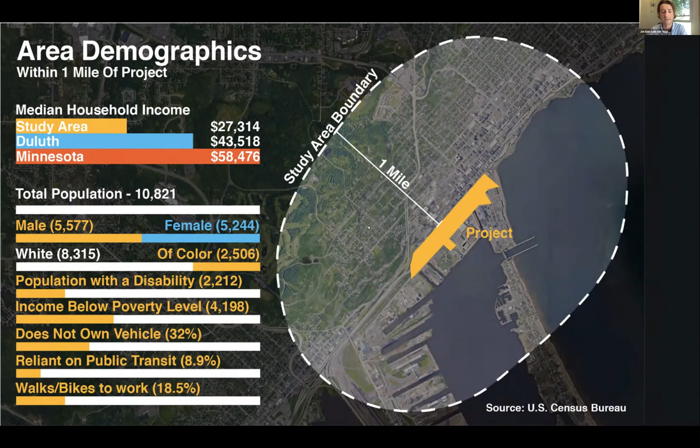This chunk of freeway takes up about 20% of what is considered our downtown area by land. And it doesn't even serve 32% of the people living nearby. So it doesn't seem like it makes a lot of sense if we're trying to plan our transportation networks in a way that is serving everybody in the community.

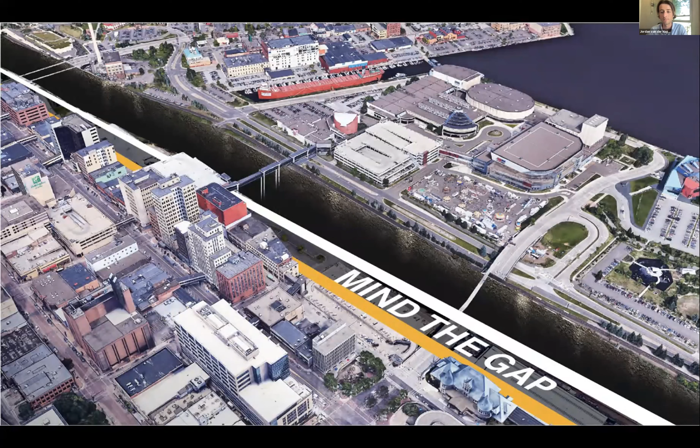And so if you don't have a car, this is what it feels like. A freeway by default is a mode of travel that is exclusive only to people in vehicles. So if you're not somebody who has a car, this is what you've got to work with to get to the waterfront.

And then even for traffic, we see the way that the freeway has congested our downtown and Canal Park areas by forcing everybody into these bottlenecks to get across the area or onto the freeway. Interstate 35 itself is pretty under capacity, whereas the Lake Avenue overpass is almost at, I think, 200% of what it was intended to handle, or at least at the point when this information came out, it was. So even for cars, it doesn't make a lot of sense.

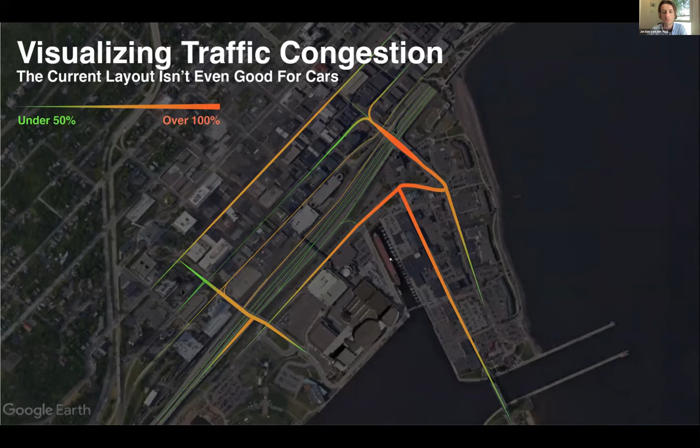So we're trying to figure out how can we rethink this area to spur economic growth, create green space, improve safety and mobility, and create a unified downtown. By replacing this infrastructure barrier that keeps people apart with a series of places and spaces intended to bring people together, we can create shared experiences amongst people of diverse backgrounds to improve understanding and compassion within our community, especially after all of this time where we've been isolated socially and politically and among so many other lines. It's really important for us to think of ways we can come together.

So there would still be a pretty reasonable vehicle corridor running through this space. We intend to design that to be able to handle the traffic that we see in our downtown. But in addition, it would also be able to accommodate rail traffic, bike and pedestrian traffic, and then also reintroduce a street network into the downtown and Canal Park areas to really kind of stitch them together.

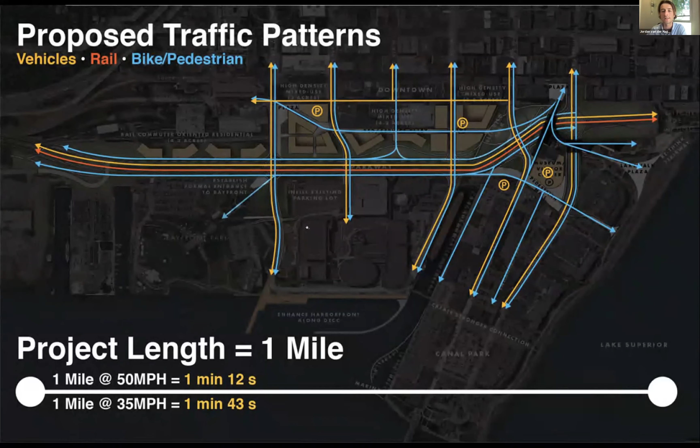And then with the space that remains, it'll be broken up into one of two uses. 20 acres of this land could go towards new development options. This gives us an opportunity to create things that are missing from our downtown and figure out what our community's priorities are and address those in a way where we don't have to demolish any existing development. All we're getting rid of is concrete here, so it's not displacing anybody.

And then with the remaining space, we would be creating new parks, greenways, parkways, and connecting existing green spaces together to create a system of amenities for people in the community, but also creating spaces to overlay green infrastructure and treat stormwater and handle other environmental concerns that our city is facing.

And so just the preliminary concept that we've put together decreases roadway pretty considerably. It almost doubles green space. It doubles the amount of buildable space, which increases tax revenues. And it also decreases our road maintenance burden that we have to face as a community.

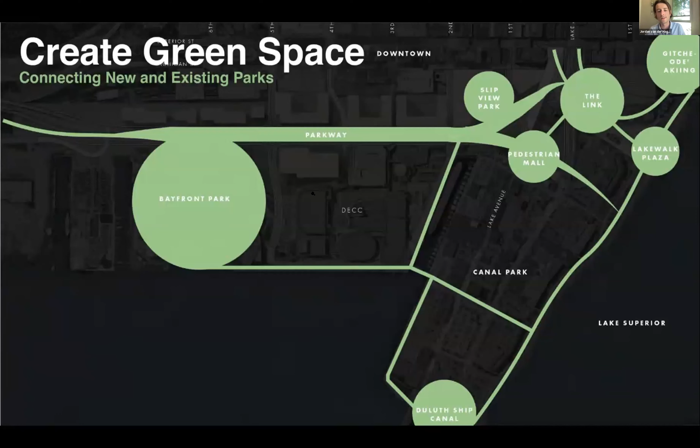So again, this is kind of what we're looking at right now, and this is what we're proposing. You can really go deep into this and overlay a lot of different things. These are just items that we've heard from people in the community of what they want to see: transit options, rail options, green infrastructure, new developments, and then maintaining traffic flow to some degree.

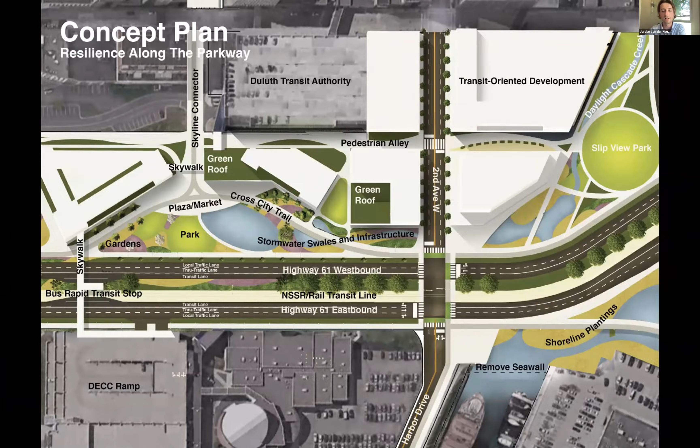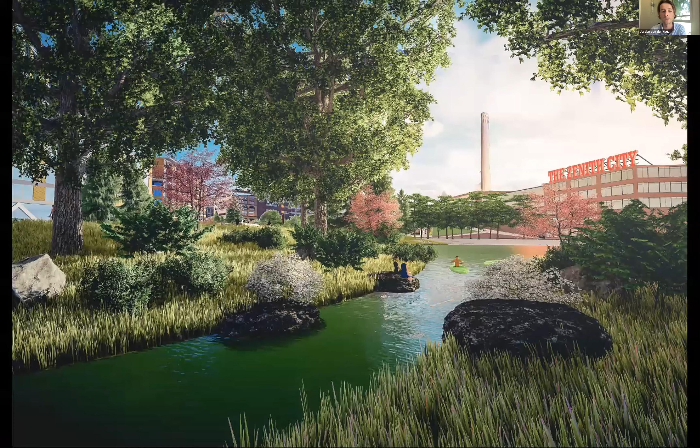So we have a real opportunity here to think about what this space could be in terms of becoming something that the community can really enjoy more than they can with the freeway as it is. But in order to do that, we have to get rid of the freeway first. And so how do we do that? That's kind of the question we're hoping to answer today.

So as we move on through our next speakers, hopefully we can come away with some answers and keep this moving forward. So with that, I'll turn it over to Ben.

Thanks, Jordan. That was a great overview of what you all are doing. And I even saw some new things, which is exciting. It looks like you guys have really been working on developing the concept.

So let me do the infamous screen share dance here. And what are you seeing? What are you seeing here? It looks right, the end of the road, right? All right, sounds good.

Yeah, so to build off what Jordan has said, I'm going to do a little bit of storytelling about the Highways to Boulevards movement. And storytelling, I think, is really important for campaigns like the Duluth Waterfront Collective, thinking about what's happened in the past, what people experience now, and what we can get to in the future.

So as I said in my introduction, I'm Ben Crowther, program manager for the Congress for the New Urbanism's Highways to Boulevards initiative. Since 2008, CNU has been gathering data and information on both the benefits and the best practices of highway removal. And we've been working with advocates like the Duluth Waterfront Collective nationwide. As I also said, we publish every 2 years our Freeways Without Futures report, which in this edition included Duluth's I-35. So I'm here to talk a little bit today about why we included I-35 in the report and where it fits into this larger Highways to Boulevards movement.

So we've seen this image already, I-35 through downtown Duluth. For a bit of context, this part is the northern terminus of the nearly 1,600-mile long interstate that goes all the way down to Laredo, Texas, at the other end of the country. The highway is as wide as 8 lanes in some places, including the frontage roads. And as Jordan said, it occupies around 20% or so of the land downtown.

It's a really significant barrier between downtown and the Lake Superior waterfront. And as those of you who live there know, there's only 3 connections to get across it: Lake Avenue, Harbor Drive, and the pedestrian Sky Bridge.

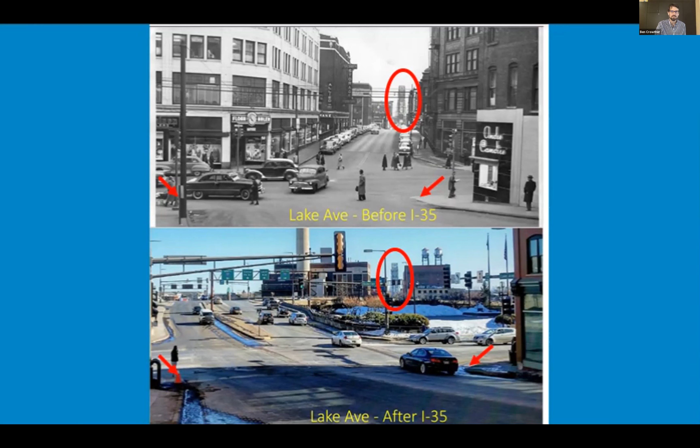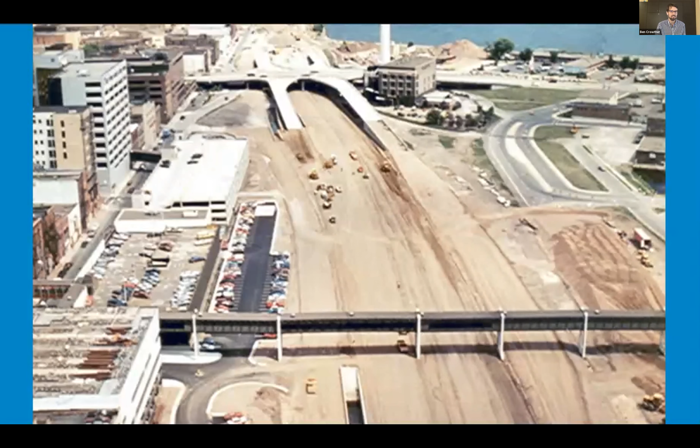And so here's where those buildings along Lake Avenue went. This is the construction of I-35. It starts in Duluth in 1967, and the downtown portion is largely completed between '87 and '91, which is really late in the era of interstate building.

But in response to this plan, you get Duluth residents forming several different advocacy groups in an attempt to steer the highway's path as it approaches downtown. They're ultimately able to direct that to some degree, preserving the natural asset of the waterfront, but are unsuccessful in keeping the highway completely out of downtown. So the highway builders and advocates reach a compromise which routed the road along the east side of downtown through a series of tunnels and freeway caps—the configuration that exists in Duluth today.

And while I was digging into this history, I came across a 2010 article in the Duluth News Tribune, part of which I think it's worth reading aloud for its impact. So today it's easy for visitors to see the benefit of the interstate. The Lake Walk Bike and Pedestrian Trail follows the rebuilt shoreline. Young and old alike can wade into the lake, throw stones, or choose to clamber over massive boulders. While they walk or bike, people can admire the 550-foot-long ceramic tile image wall below Lake Place on the outside highway wall.

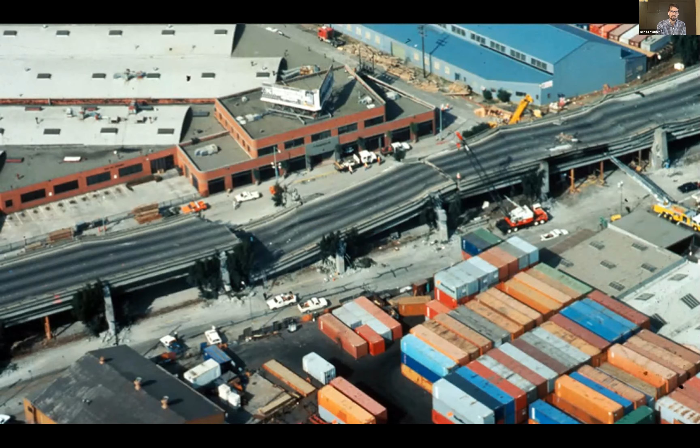In 1989, the Loma Prieta earthquake struck California's Bay Area. In Oakland, the double-decker Cypress Freeway in West Oakland collapsed. When Caltrans went to rebuild it, West Oakland residents who contested its original construction mobilized again and convinced the state to reroute the freeway to the periphery of their neighborhood rather than directly through it. This is the former route of the Cypress Freeway today, now called the Mandela Parkway. The freeway's right-of-way has been repurposed into a landscape median that West Oakland residents are able to enjoy.

That same earthquake also damaged San Francisco's Embarcadero Freeway, whose route was never completed due to a 1959 freeway revolt. Rather than repair it, the city opted to remove it and reclaim access to its waterfront.

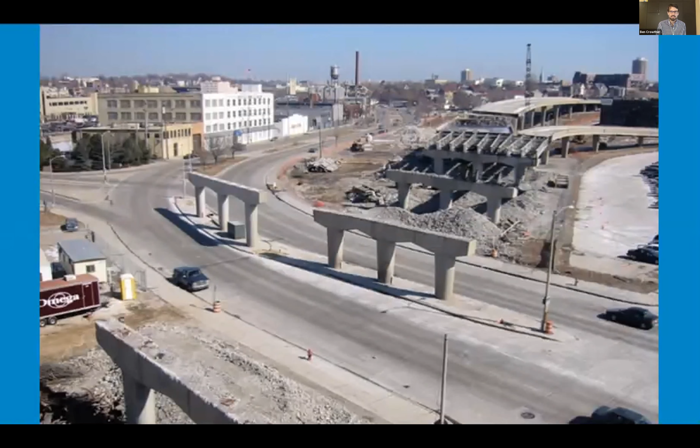Fast forward a few years to 2002, and the city of Milwaukee chooses to dismantle its Park East Freeway, once again a highway that was never completed due to a freeway revolt. This active choice to remove a freeway heralds a new generation of the Highways to Boulevards movement, one where an act of God isn't required for highway deconstruction.

Out of this generation of Highways to Boulevards projects, we get examples like the removal of the Riverfront Parkway in Chattanooga, a city that's on a scale probably more comparable to Duluth than Oakland or San Francisco. In 2004, the city transformed its 4-lane limited access highway into a 2-lane boulevard that provided easy pedestrian access to the waterfront. It's worth noting that the old Riverfront Parkway, that 4-lane road, carried approximately 20,000 vehicles a day at its peak. We'll come back to that number a little later.

Then in 2017, Rochester's Inner Loop becomes the most recent addition to the Highways to Boulevards completed projects. I won't step too much on Maria's toes here, I suspect she's going to talk a lot about this, but by filling in the depressed Inner Loop, the city's able to reclaim 6.5 acres of land for building. It cost $22 million to fill in the Inner Loop and rebuild Union Street.

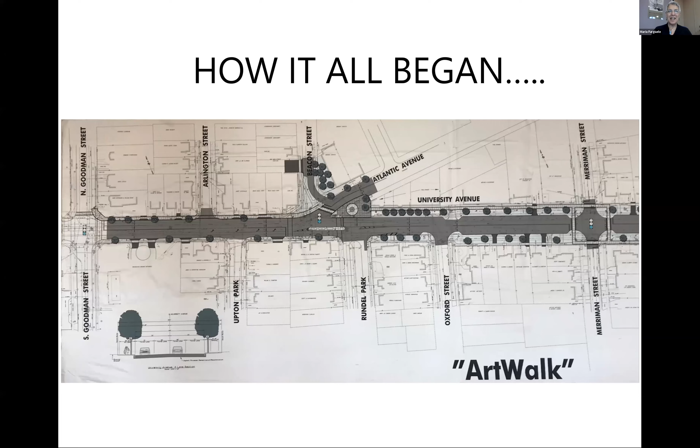As a result of this project, the community members determined that they wanted to create a link between the existing Memorial Art Gallery to the west and the Eastman House and Museum of Photography. This became known as Art Walk, and the trail incorporated public art, custom designed borders for the sidewalks, community art installations all along the trail. The neighborhood became known as the Neighborhood of the Arts and is now one of the most desired neighborhoods in our city.

Johnny Monroe and the group of architects became the founding members of the Urban Design Committee of the AIA, which eventually led to the founding of the Rochester Regional Community Design Center, now renamed the Community Design Center of Rochester. I know, not much better.

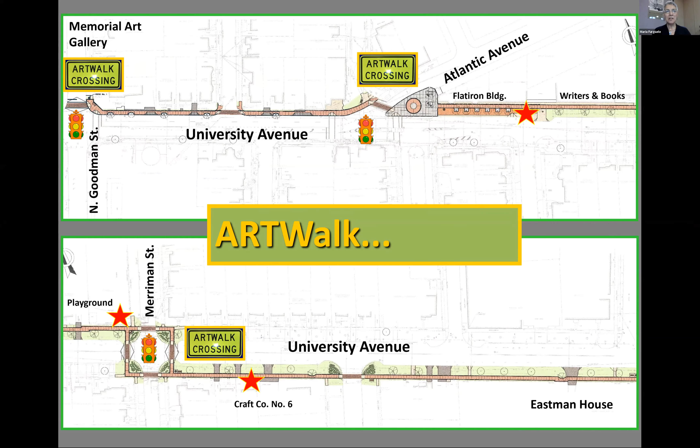This is a view of the Art Walk project showing one of the public art installations, a historic building in the works there. So it's quite a beautiful place to be.

I show you this slide just to illustrate the incredible importance that road design can play in creating a transformative impact in placemaking. Shortly after this project was completed, a publication noted that this was an important example of the positive effects of community-based planning.

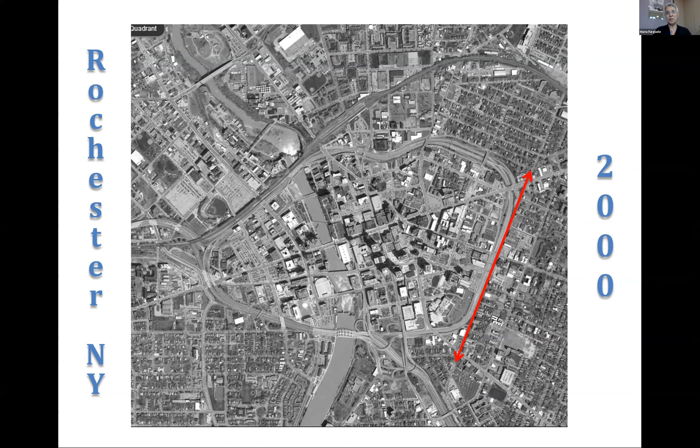This is Rochester in 1930. Notice mostly the fine-grained texture of the urban pattern. Here we are in 1960, where you begin to see the clearing for construction of the inner loop. Notice also how that fine grain texture is being consolidated into larger blocks. Here we are in the year 2000, where you clearly see the result of the inner loop and how it completely separates the downtown district from all of its surrounding neighbors. That red arrow locates the Union Street corridor, which is the Inner Loop East project.

This diagram shows that the Inner Loop project was divided into two projects. One is the Inner Loop East project that was completed, recently completed about 2018. This is the Inner Loop North project, which is under consideration currently. The dividing line is generally Main Street.

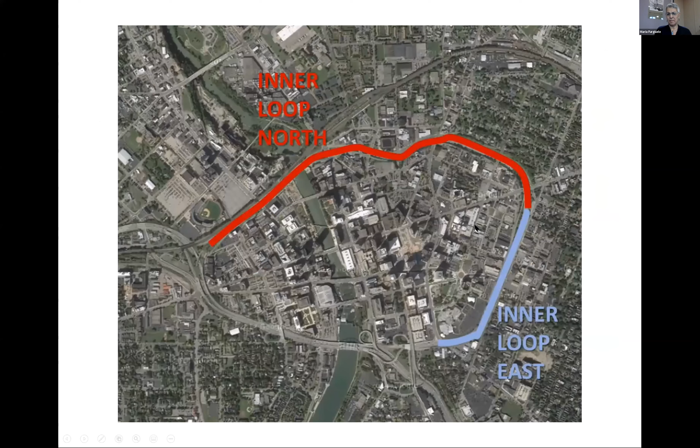One of the first charrettes that the Community Design Center facilitated, even before we were founded as a standalone not-for-profit, was the Vision 2010 Downtown Charrette. This brought 200 residents to share their vision for the downtown, and this happened in May of 2000.

This is one of the renderings created at the Downtown Charrette. Here you can begin to see how people envisioned the inner loop being filled in and reconfigured. A lot of the information gathered at that downtown community charrette helped to inform the 2003 Center City Plan.

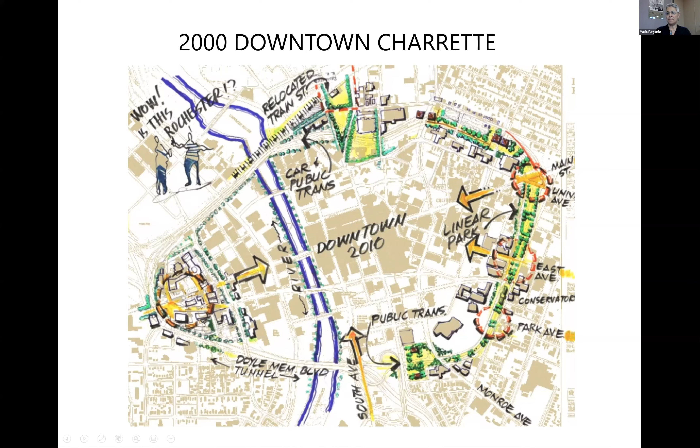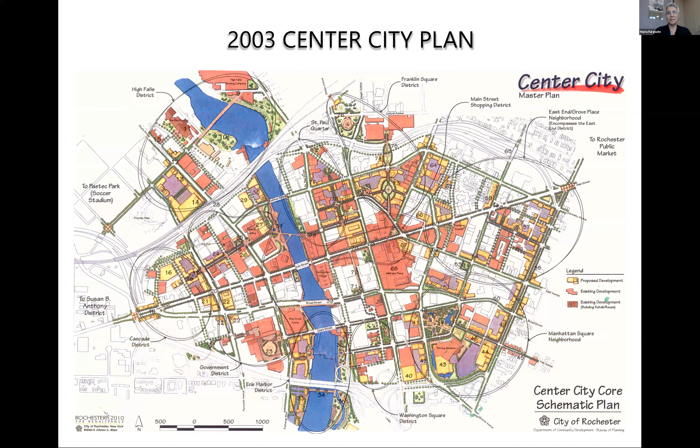In 2013, the City of Rochester received an award of Tiger Grant funding to pay for this project. This project entailed filling in the inner loop, creating a surface roadway, and creating bridges to reconnect so many of the streets that had been severed as a result of the Great Moat. It created this open land that was made available for development.

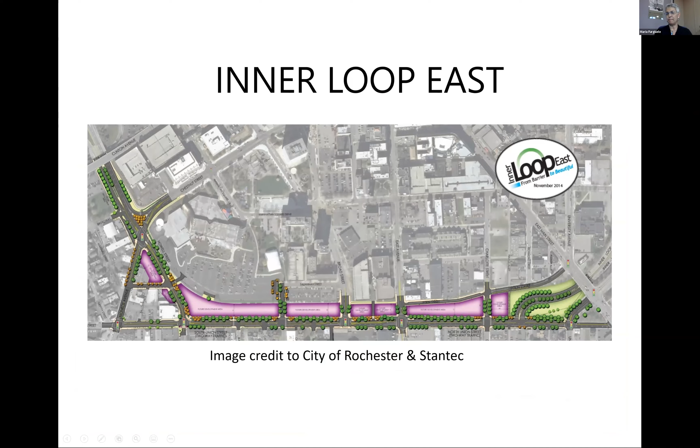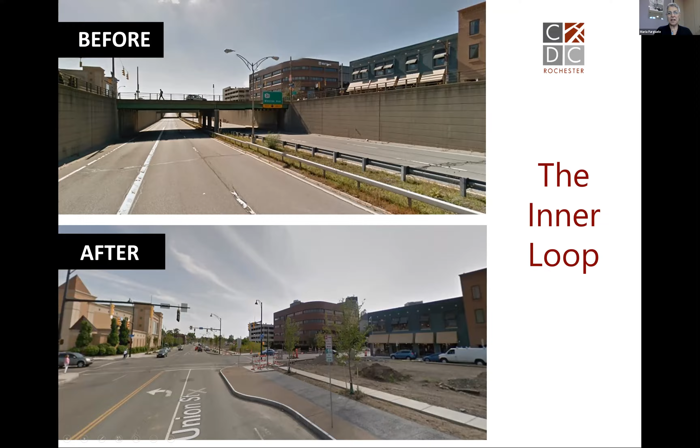So this is the inner loop as it was. I want you to pay particular attention to this building up here. Here it is once again, once the at-grade roadway was installed. And here we are today. This is the pedestrian and cyclist perspective.

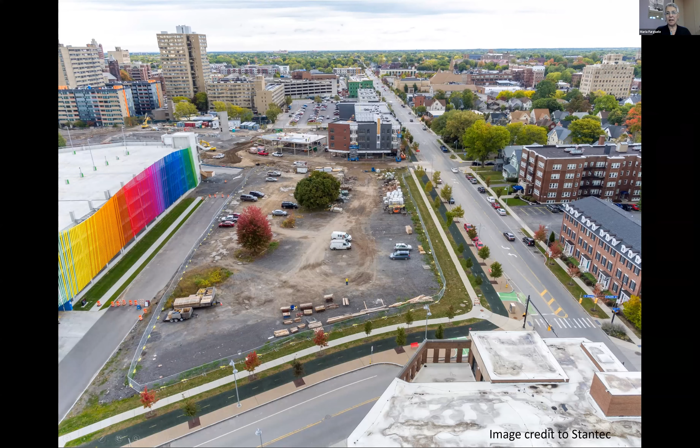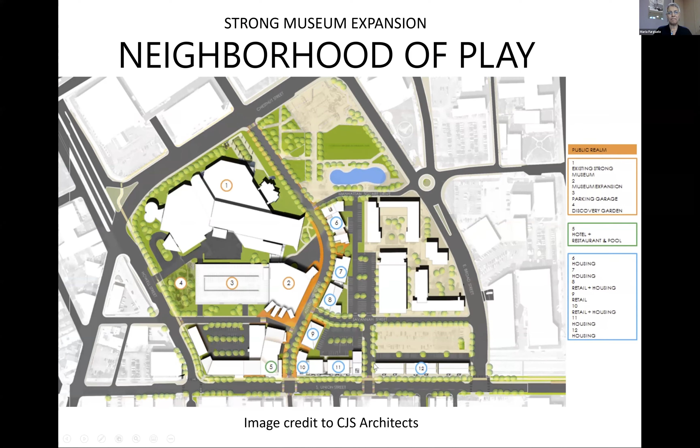Now we are considering how we're going to handle the Inner Loop North. The city of Rochester hired a consultant to do a planning study. The consultants have done a tremendous job gathering community input despite the pandemic, while also doing a tremendous amount of analytical research.

One of the first things we needed to do was, fortunately the city of Rochester recently adopted a new comprehensive 2034 plan. The first priority was to make sure any of the goals for this proposal aligned with those identified in the comp plan, both regarding policies and placemaking.

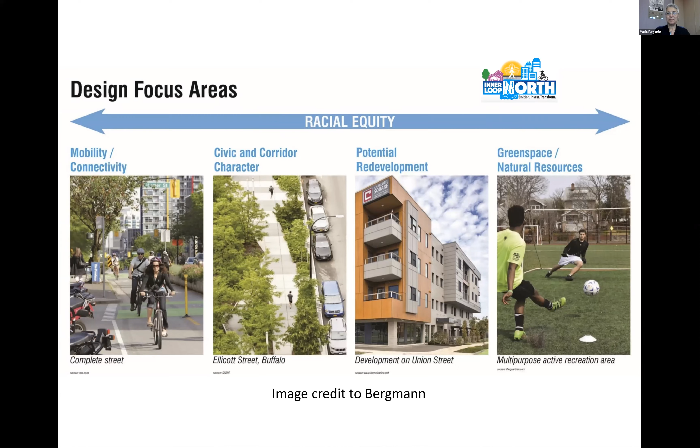I want to give a huge shout out to Hinge Neighbors. It was an organization founded before the Inner Loop North project was even envisioned. They enlisted the help of the Community Design Center and Landmark Society of Western New York to help empower local residents so they can articulate their vision.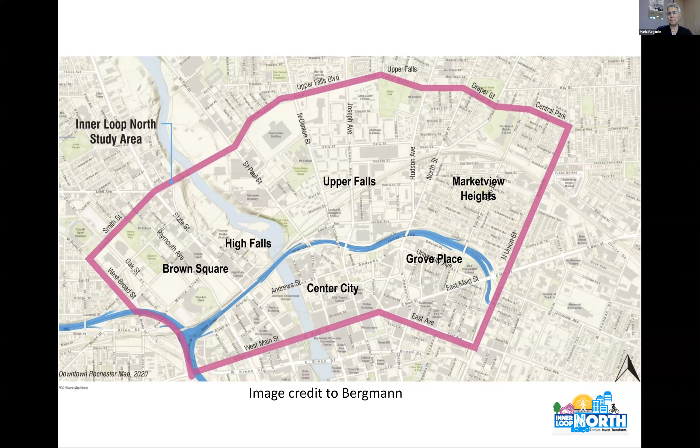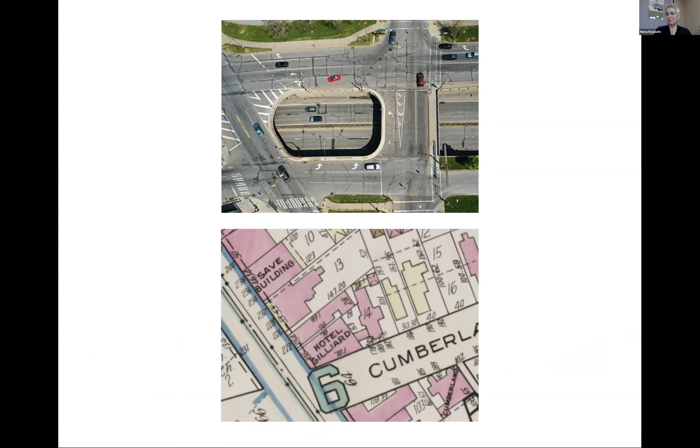And so this is a little bit of what was lost. We see that the Inner Loop North tore through entire blocks of streets just like this one.

How can we repair the damage that was done? And are there restorative practices that we can implement to start the healing? These are some of the questions that we need to answer.

Interestingly, I found this image just a few days ago. This is from the Rochester downtown charrette in 2000. It might be hard for you to see, but very faintly is the outline of the inner loop in yellow. And this is one of the solutions that was proposed 20 years ago for the removal of the inner loop. Interestingly enough, what it did was it just reintegrated the existing urban street grid.

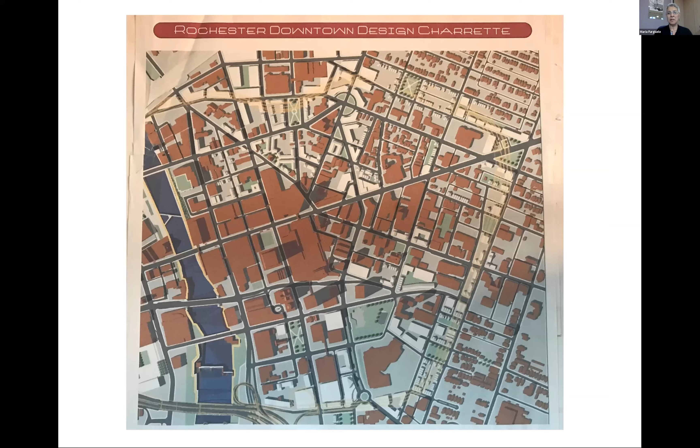And so we've come full circle and recognized that the urban grid is the most efficient way to dissipate traffic, especially through a network of narrow streets that are designed to slow traffic, that are easy for pedestrians and all users to cross and enjoy. These narrow streets help to maintain a dialogue between the two sides, bringing both sides together into a common space rather than separating and dividing it.

The solution erases that terrible scar that was the inner loop and frees the maximum amount of room and space for redevelopment in a way that we hope the neighbors will be involved in its creation.

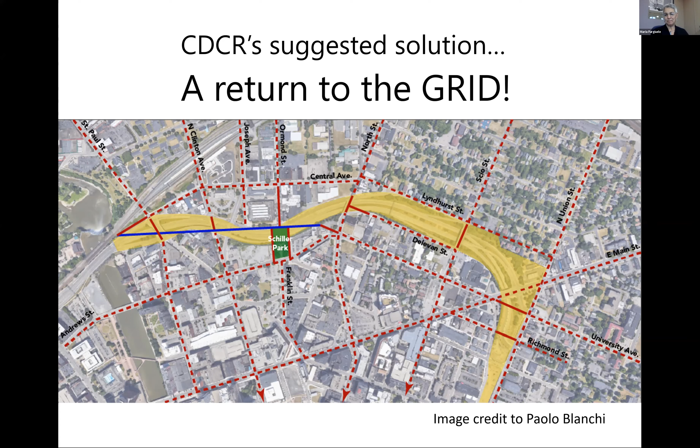And lastly, I had the great privilege, the Community Design Center had the great privilege of having both Peter Park and Norm Garrick as featured speakers in our Reshaping Rochester series. And this is a quote from Norm: 'You design a transportation system to nurture the type of city that you want. It's not just about moving people, it's about creating a type of place.'

And so with that, I leave you.

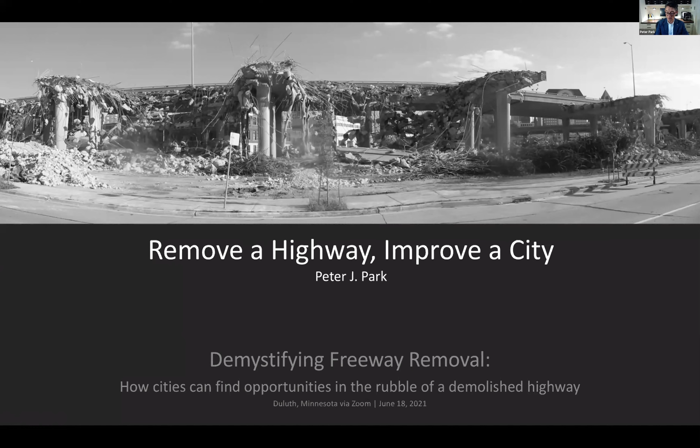All right, great. So I'm going to share with you maybe 10 perspectives. I've got 10 words or 10 phrases to go through in thinking about these initiatives to rethink highways in our cities.

Choice, right? As Americans, we think choice is a pretty important thing. We really value the notion of freedom. We value the notion of improvement too. But we have to be very careful when we talk about improvement. For example, at the McGrath Highway, do you think if these folks had a choice, they would choose to have that structure built in front of their house? I doubt it. Would that be the one that I would choose if I was given the option?

Or in Denver, under I-70, this was the route that families and kids would take to get to their school under this highway.

And so one of my colleagues made this cartoon. He talks about street improvement, and highway improvements. We got to be really careful with the language to be clear about when we talk about improvement, is it really ultimately improvement? So given the choice, would you rather have this kind of environment using your tax money, or would you rather create these kind of places? So think about the choices, because it is a choice.

Second idea is opportunity. We sit in a really important time. We have aging infrastructure. That's the bad news, but it's also the good news. We also have the phenomena of the return to the city and people coming back and seeking urban life. And we have a lot of successful examples globally to consider.

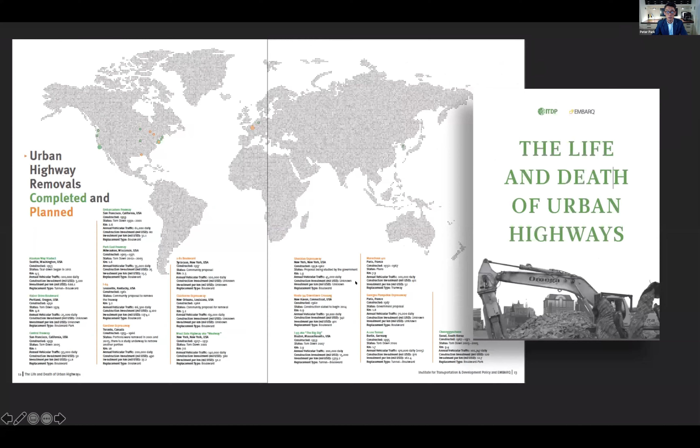ITDP - I helped ITDP on chronicling examples across the globe of successful highway removals. And as Ben mentioned, CNU has been doing an incredible job chronicling across our country, particularly examples of these opportunities for rethinking.

So one of the things I want to re-emphasize, and Jordan has pointed this out in his work, is that there's a fundamental design flaw in applying a limited access highway to a city. Limited access is completely opposite of what cities are about and have always been. Cities have been about access and exchange - economic access, social access, cultural exchange. So if you take a limited access highway, like I-70 across the countryside, I don't want a stop sign at every county line road. Limited access makes sense for that kind of travel, but that's not the fabric of a city.

In fact, the original design for the American highway system by Norman Bel Geddes in the 40s was actually modeled after the Nazis' highway system, but the idea was to have a high-speed road system connecting cities. You get off at a major city, it branches off and distributes into the street network, providing limited access here and robust access as it moves and connects city to city.

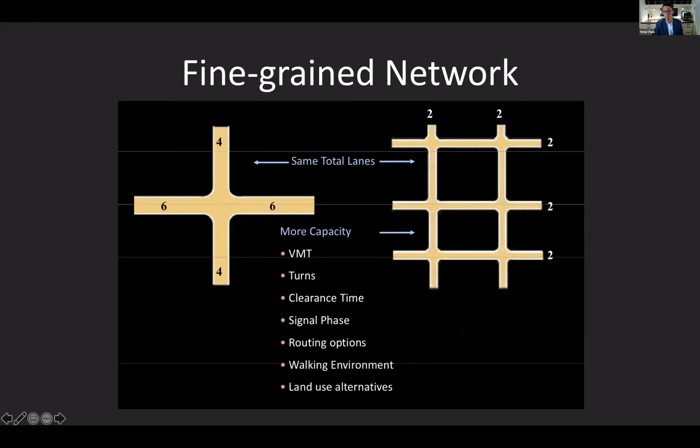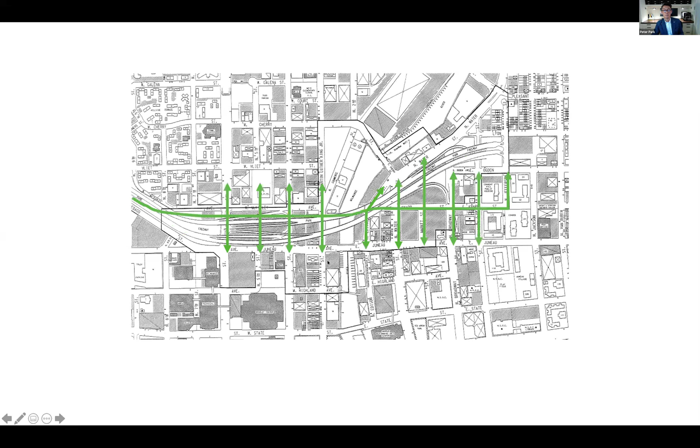So in Milwaukee, the problem of the Park East Freeway was that there were only 3 ways on and 3 ways off. Limited access in an urban grid creates congestion. That's the design flaw. So everyone at rush hour hurries up to wait on the one-way streets that feed the on and off ramps of the freeway. By taking out the freeway, you create access so people can get into the grid. You don't have to overshoot your destination and work your way back through the street grid. Think of that design: it's inducing more travel, creating more pollution, putting more wear and tear on cars. It's crazy. Why would we create a system that induces more travel? If I was a tire salesman, I'd understand that's a good thing, but that's not what we're talking about.

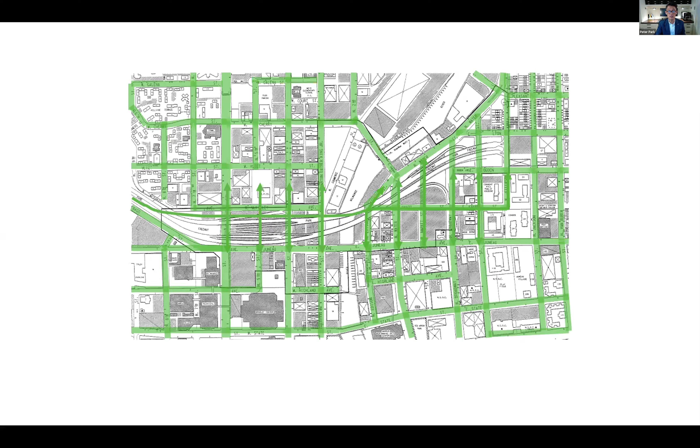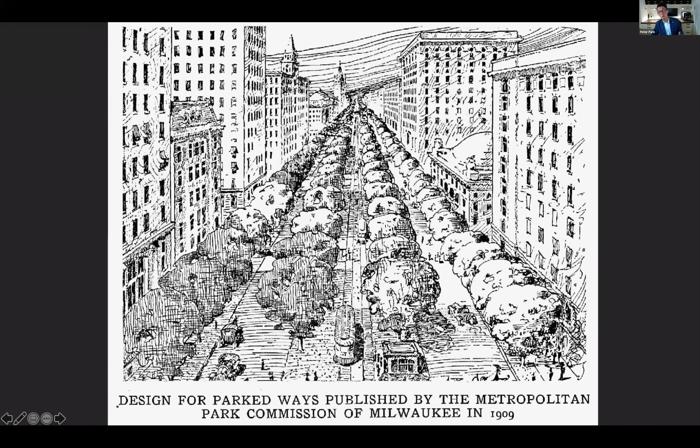I love this drawing from Milwaukee from 1909, when Milwaukee was a growing city. What you see here is a boulevard, a beautifully tree-lined boulevard with transit down the middle, a roadway, and wide sidewalks for pedestrians. It's such a beautiful street that people would want to have their address on it. That's a way of thinking about public investment that drives private investment, creating reasons for the private sector to put their money there and activate places. But it takes a street design that makes people want to go there. It's a fundamental value capture perspective.

What happened in San Francisco, as Ben pointed out, is the freeway came down. Did San Francisco suffer? They talked a long time about whether to rebuild it or not. Like, how will people get to Chinatown? We'll lose money and the whole economy of the city will falter. Didn't happen. San Francisco has a different kind of challenge—it's extraordinarily expensive and desirable. The freeways didn't hurt the value of property in San Francisco. If anything, it helped accelerate San Francisco's rise.

So transit-oriented development, TOD, is a term people might be familiar with, and the idea has been around for a long time. I really prefer to think about development-oriented transportation—that is, we make our choices about transportation to be focused on development, not transportation for the sake of transportation or mobility, moving things around. But DOT isn't a great acronym if we're trying to change our orientation.

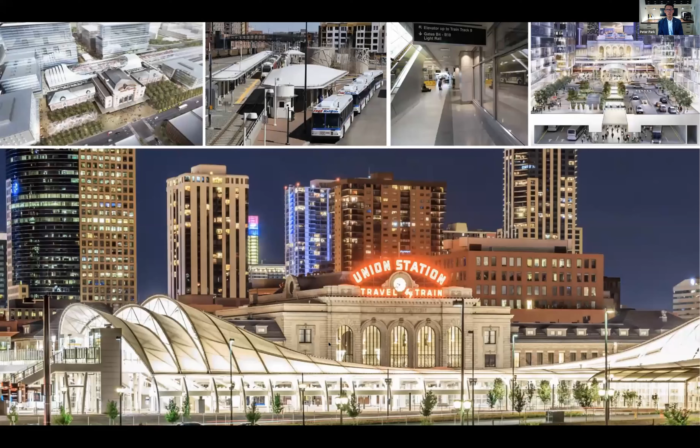Development-oriented transportation is the perspective we used in developing Union Station in Denver. We redesigned, from the master plan, all the components—bus, light rail, commuter rail, ski train, Amtrak—reorganizing transit to maximize the opportunity for development and create a walkable urban environment of new development, setting historic buildings to really shine. So I'm really about POT, not DOT—and don't get me wrong, not just because I'm from Colorado.

What I mean there is place-oriented transportation. That's the way we need to think about our investments in public infrastructure.

When the Cheonggyecheon River was covered over, capped with a freeway, that freeway was removed, and it completely changed Seoul in an incredible way in terms of making places for people, sparking a river restoration and cleanup movement. They took out another section of freeway. There's no example of a city that was ruined when the highway came out, and no example I've found, and I'm pretty sure Ben hasn't found one either, of a neighborhood that got better when a freeway was cut through it. It's not theoretical.

Every example has worked. What it takes, I'd suggest, is this: you have a downtown plan, and your downtown plan gives you all the evidence and policy support you need to pursue this. But planning now is really important, and having an urban vision for your future.

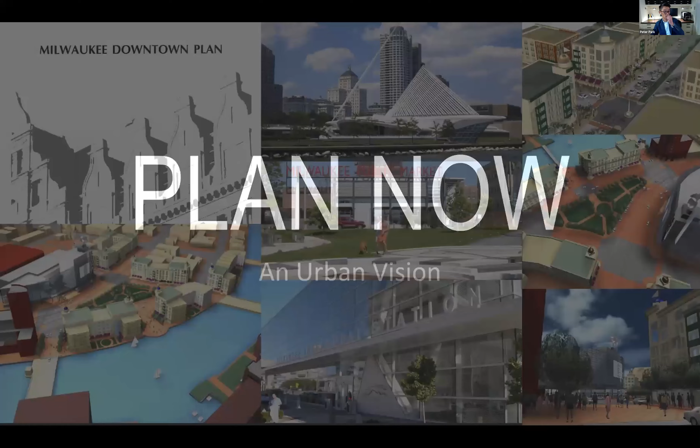In 1999, we did a plan for downtown Milwaukee about making downtown more walkable, changing it from an automobile-prioritized place to a walkable urban condition. Most of the recommendations were implemented within 10 years of this 20-year plan, including taking out the Park East Freeway.

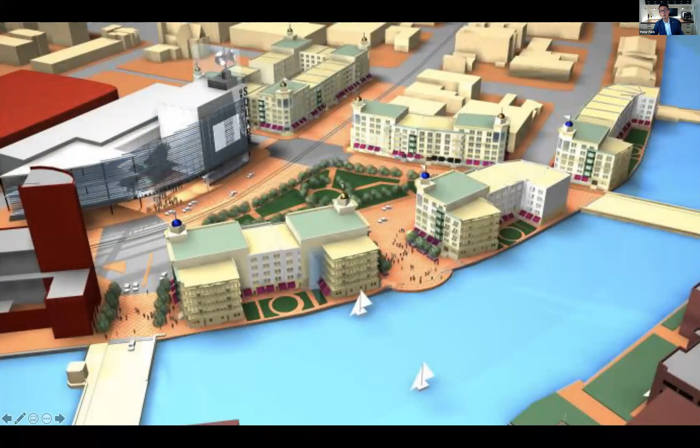You can see this was the highest and best use of land, parking lots along the Milwaukee River dripping oil and gas into the river, parking lots where neighborhoods used to be. We made very simple drawings to imagine: what if the freeway wasn't there? What if it was surrounded by mixed use? What if we focused on transit, a new streetcar, and new public spaces along the river?

So we had a vision. It was adopted in 1999. We had no idea when it would ever occur - the freeway wasn't falling down, it wasn't San Francisco. But we had a local point of view about what the future of this area should be, to be considered when eventually this highway would need to be replaced.

We were very fortunate. It happened much quicker than we expected. We can talk about this later, but ironically, Harley-Davidson motorcycles was the key to actually taking out the freeway. It's a very interesting story.

The second thing is coding for predictable development. I'm on the Form-Based Code Institute Steering Committee. A lot of my work relates to form-based codes and rethinking how we regulate city development. This is something within local control - this is what Duluth has, you have zoning authority.

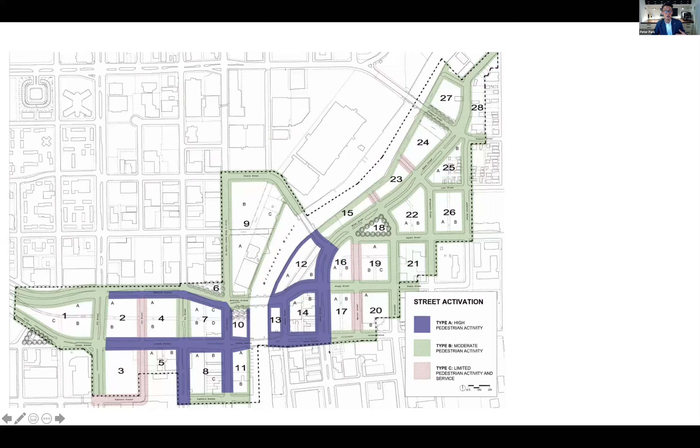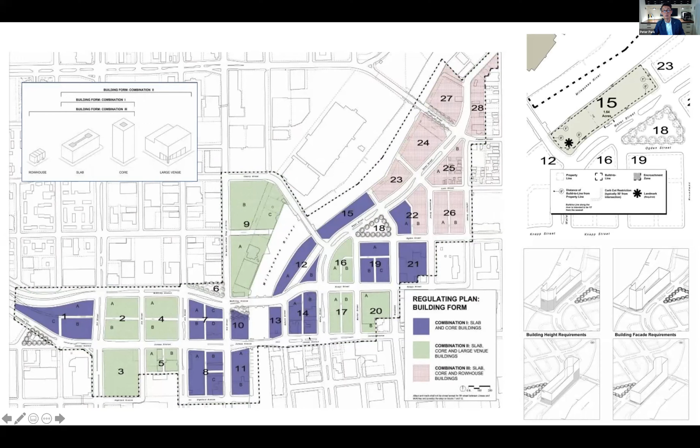We did a plan and a form-based code focused on street activation and making more pedestrian-specific areas. We created a very simple code of four building types assigned to an overall master plan and regulating plan that has been shaping new development in the area.

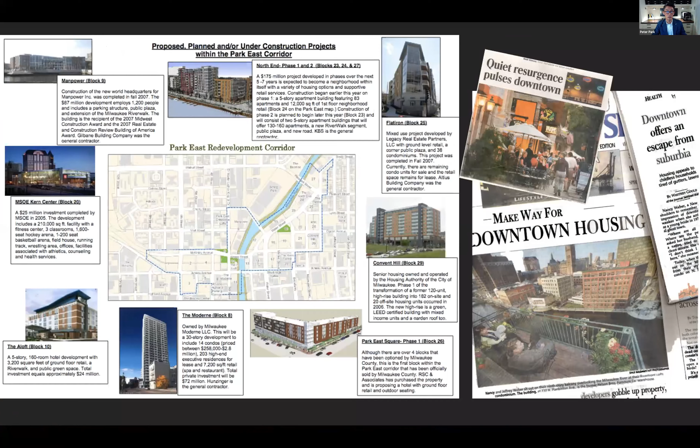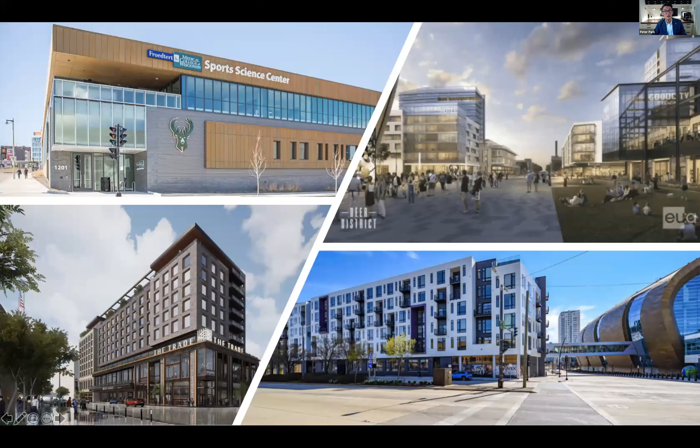What's ensued is a range of new kinds of development, from office to residential, lots of new projects from affordable housing at Convent Hill, a Milwaukee Housing Authority development, to a whole range of market-rate, luxury and mid-market housing. The new Milwaukee Bucks arena is here, called the Deer District. There's also a new Froedtert Hospital, and the Medical College of Wisconsin has a sports science center associated with the Bucks. There are new hotels. So even in a city like Milwaukee, which had been losing population, development and urban interest continues around this newfound land.

Now let's talk about the land, because I think this is going to happen for you. What you've got to make sure you do is make sure the city controls the land. So discussions with the state and the Feds need to prioritize swift land transfer for local control. This is about 20 acres of land that was in the Park East Freeway corridor.

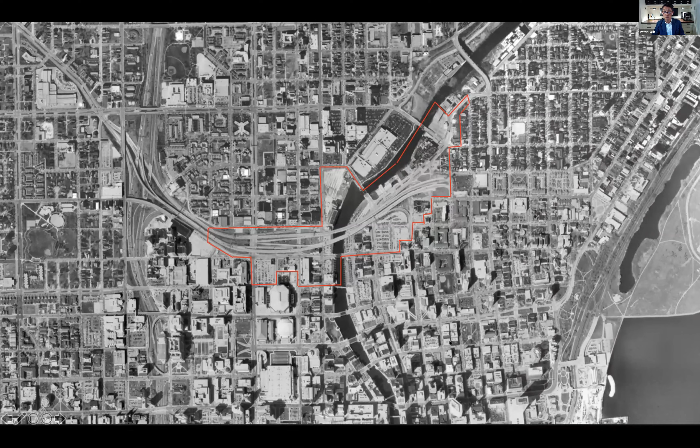By the way, we were able to negotiate not having to pay them back for the land, which makes complete sense. But I think some DOTs that are considering these things aren't always thinking about that. They're thinking, how much can we get for this very valuable land? I think they should just give it back to the communities and let the community decide how they want to use their land that has sat vacant for all those years.

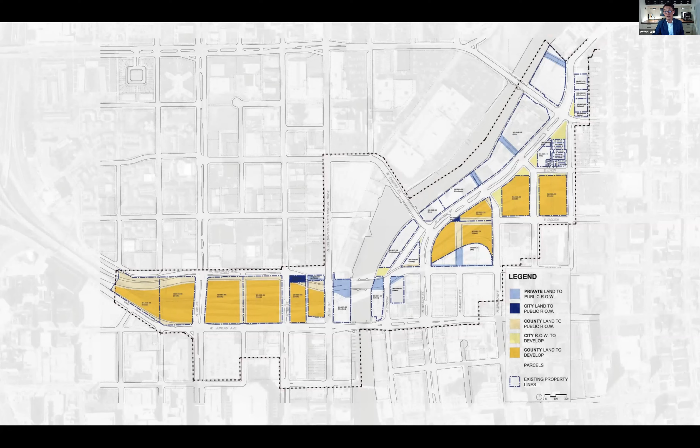In the case of Milwaukee, Milwaukee County actually sold a pretty major piece of their assets to the Milwaukee Bucks for $1. That seems a little crazy, but there's a lot of new development that has happened because of it. I'll talk a little later about what might have affected some of the value of the land.

What also happened in Milwaukee is a community benefits agreement was prepared, and the county committed to a variety of things, from prevailing wage to DBE, disadvantaged local employment, affordable housing. So again, when you own the land, you can call the shots in terms of how and what the terms are with regard to future public goods that you're looking for.

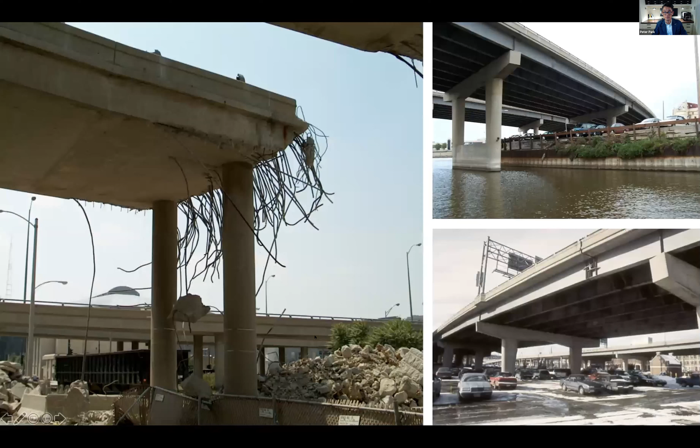There's a difference between how much control government has through regulations and how much control government has when they actually own the land.

So the other thing about this control: when we took this down, we only had enough money, and the state was not going to pay for removing the substructure. So what happened is we had the funding to remove all the freeway, put all the streets back, build new bridges, but many of the columns and footings below the surface—you see they kind of cut them off here—they still remained underground. So those become a bit of a challenge in the redevelopment of some of these sites.

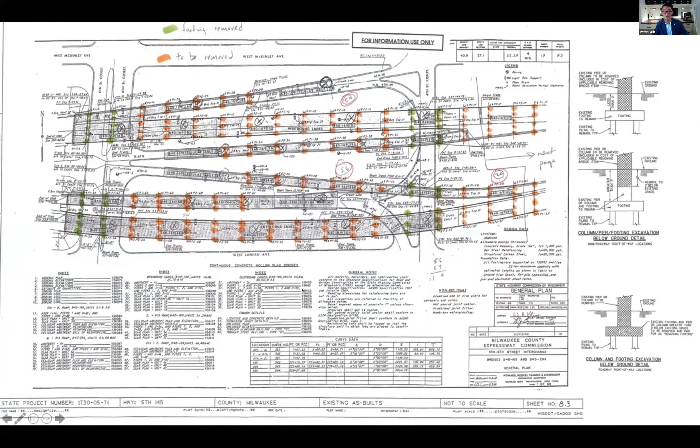But again, when you take control, think about what you're getting in terms of what's underground, not only just what's on top. And finally, leadership.

As Tip O'Neill said, all politics is local, and that's true. At the federal level, we are seeing some signs, and in previous administrations, signs of recognition of the problems of highways and cities, and the injustice of that. We have the opportunity to rethink this, that's for sure. But ultimately, it is going to be local leadership that's going to change it. It's good that we potentially have a supportive administration with regard to rethinking highways and cities—it's a great opportunity for us at this point. But it's going to take local leadership more than anything else to make this happen.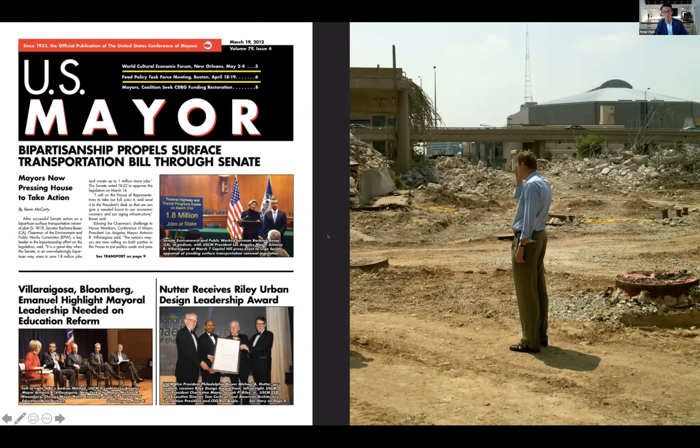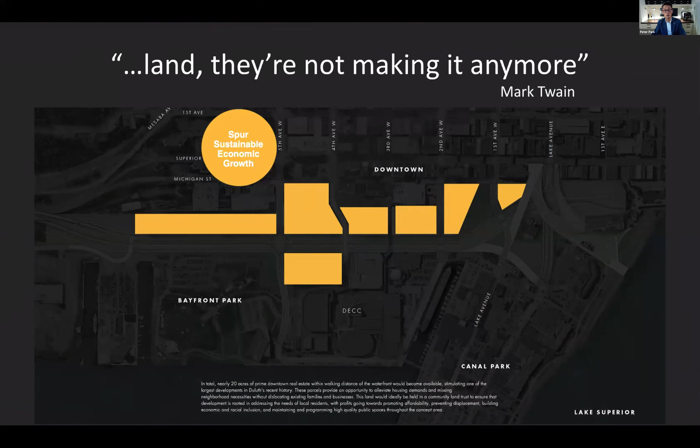So look, we should be optimistic. Technology, there's a whole bunch of things that we can do. We can make smart cars, but we need to stop making dumb places. You guys have recognized there's land to be had here. There's opportunity to re-knit, actually not just re-knit, but make a better network than ever existed in Duluth in connecting your city to the water. And in it, you actually have some land assets to actually create urban places. Congestion is not bad if it's people—if it's a lot of people, that's a sign of success. If it's a lot of cars, that's not a sign of success. Cars sitting versus people sitting, it's a totally different kind of experience.

So just to summarize: success requires strong community will, support with extraordinary local leadership and political will, and an urban vision—you have one in your downtown plan—for the city, not dominated by the automobile, that prioritizes short trips versus long trips: the walking trip, the bike trip, the transit trip.

The decision process for what happens needs to be driven by long-term community investment—the return on investment—versus spending a federal allocation on projects within a given time frame. One of the things with many public works and public agencies on infrastructure: there's kind of two phases of the project, it's either too early to tell or too late to change it. So what you want to do is foment these conversations about long-term community investment versus just spending our money, with a focus on return on investment and priority for the local community. Get control of the land, and recognize it's not technical, it's political, okay?